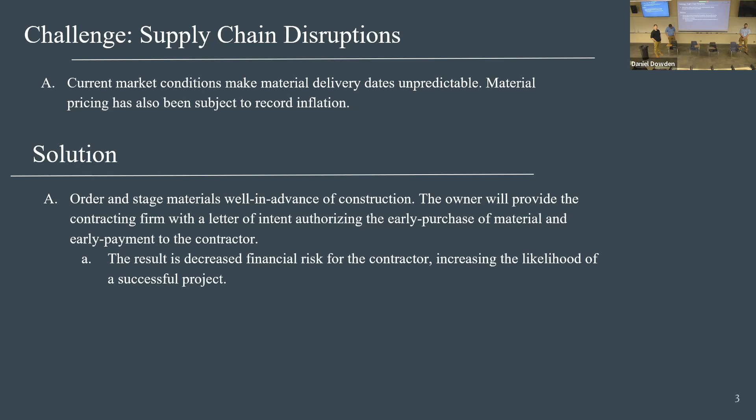One of the first challenges we faced was with current market conditions. There's a lot of supply chain disruptions. To counter this challenge, we decided the best thing to do would be early ordering of materials. And to do this, the owner would have to give the contractor a letter of intent so that they could order these materials and stage them prior to the construction phase. By doing this, it's going to decrease the financial risk and also speed up the construction process and prevent delays.

So another challenge we had was the cross-laminated timber decking. It was such a massive quantity of decking, and the only manufacturing plant for this decking is in Dothan, Alabama. And using SmartLam's data, we calculated that it would take 39 individual shipments of this decking to Houghton for the HSTEM building. Inherently, each of these 39 shipments lies on the critical path.

So with so much variability in each of these 39 shipments, there's a huge potential for our schedule to be off and our schedule to be pushed further into winter. And as we all know, construction in the winter does not happen in the Keweenaw. It could slow progress or even halt progress completely. So we identified that using cross-laminated timber from Alabama was certainly a challenge and exposes the owner and the contractor to significant risk in both schedule and financial risk.

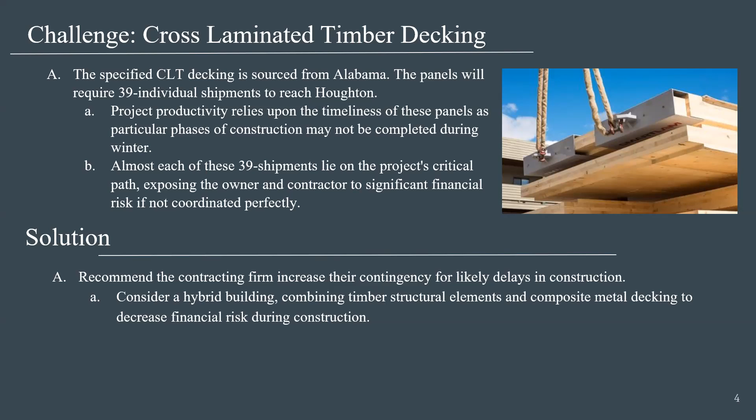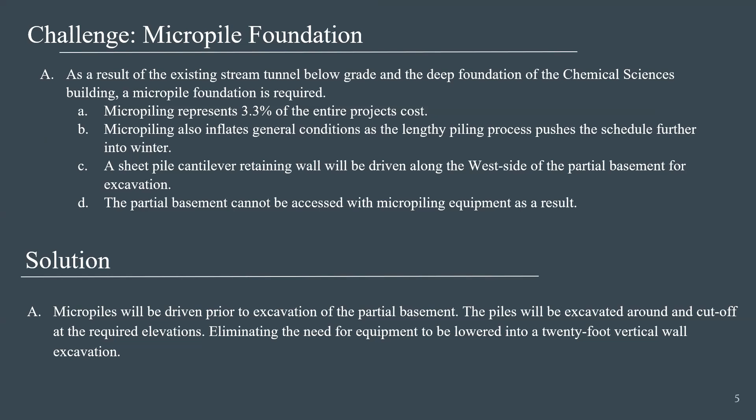Next slide, please. So here we have our total estimate broken down into each individual bid package, and then our direct and indirect costs at the bottom. As you can see, we came up with a total of $22.6 million, which seems like a lot, but in reality, the actual building is much more than that. And due to the design level that we've received up to this point, and there being no MEP engineering done, we had to basically estimate this off a square footage basis, and it was the most accurate information that we had, but it's basically leading to an underwhelming bid on our end.

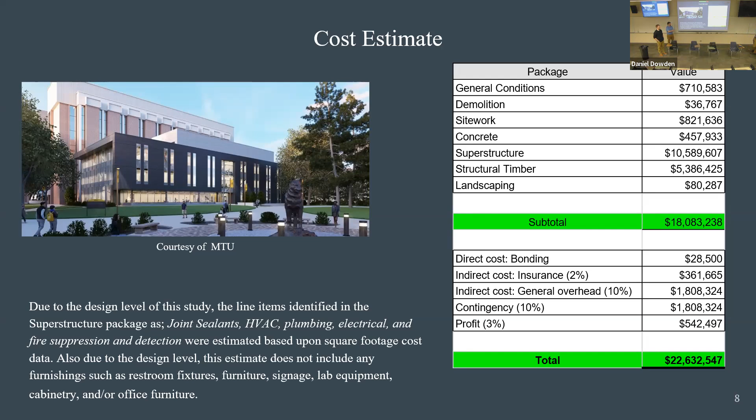So some of the considerations for our estimate: we use data from RS Means, and we utilize a location factor to adjust those unit prices. And then we used RS Means from 2017, so we inflated our cost by 17% for the consumer price index.

And then, like I had stated already, we basically based our estimate off of the original architectural drawings. So that caused issues, but we basically worked with every other group the best we could and got plans from everybody and basically did what we could with what we had.

And then the last part there, the economics of the present and future time value of money were considered in all aspects to develop a refined estimate. And that's just basically accounting for inflation and fuel prices going up and the shipping cost being extremely inflated.

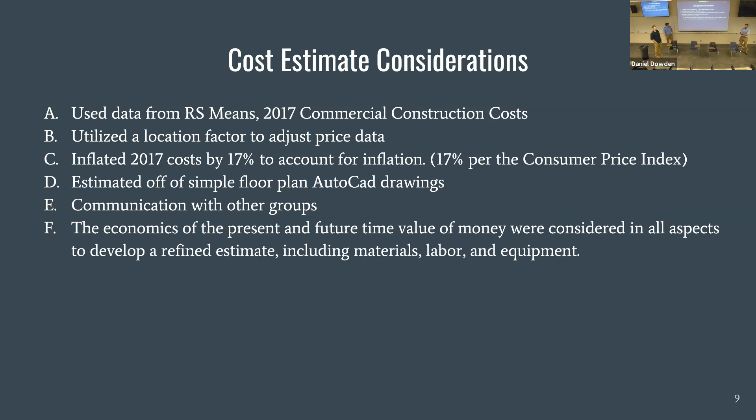All right, so here you can see basically what is our critical path schedule. Like Corey said about the estimate, there's a lot of ambiguity about the drawings that we've received, so we had to be extra careful not to short the schedule. We can always cut days off, but we can't really add more without penalty. So a lot of the major milestones are listed here.

Like when the 100-ton crane comes on site, how long it's on site will really depend on the just-in-time delivery that's going to happen with the CLT decking. If that's delayed at all, obviously the crane's going to have to be on site longer. And then things like the sustainability team, if we're going to add solar panels onto it, we're going to have to bring the crane back on site after basically everything's done and the project's at least weather tight.

So yeah, our 100-ton crane will be on site for about 5 months. We'll have it weather tight in another 5 months after that. And then we left quite a bit of time for all the interior finishes and things like that, because we really don't have any idea what the lab equipment is going to be in the building.

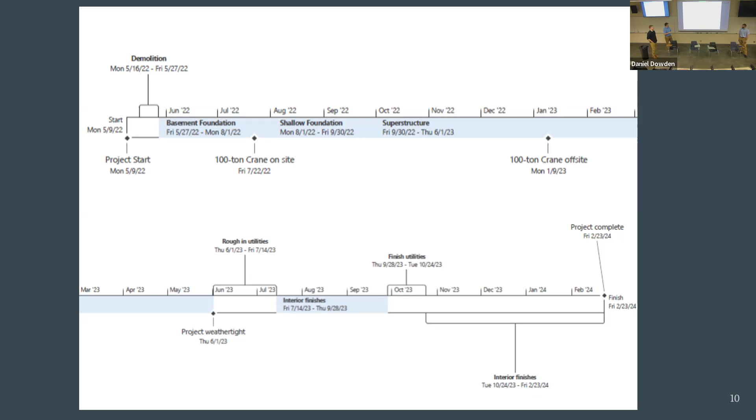And then just some of the things that we did for the schedule overall is we had to identify the critical path, what's completely essential to the schedule and what can be based around other things. Obviously we had to contact SmartLam for the productivity that we were going to be able to do with the CLT decking and those members that we're going to have to utilize.

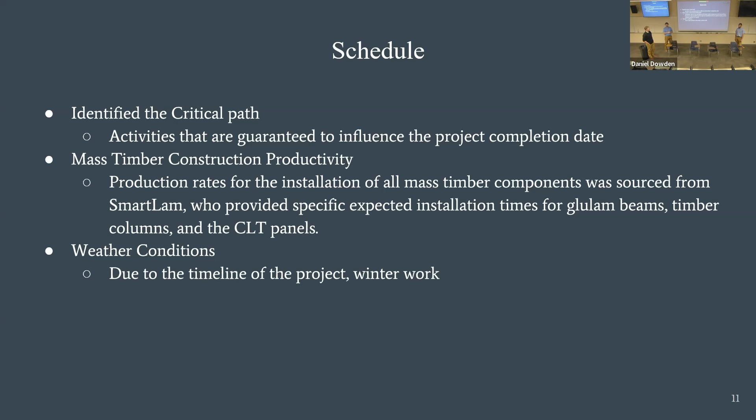And then obviously the weather conditions we had to consider. We have very long extreme winters up here. They're really unpredictable, things like that. So we just had to make sure we considered that at all times.

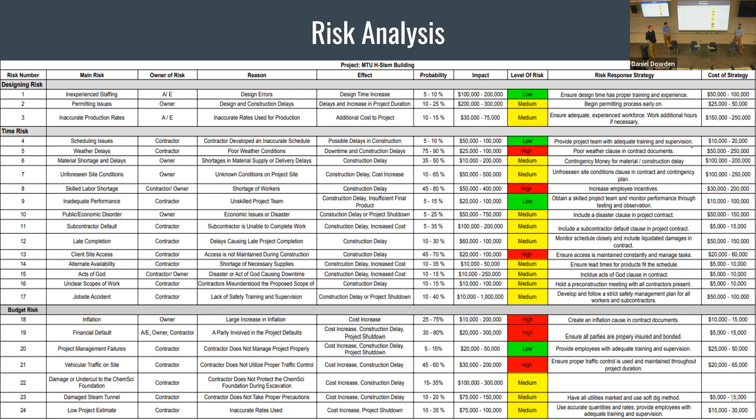Some of the important risks, which we already outlined, are material shortage and delays, unforeseen site conditions, stuff like that are all anticipated risks that you could probably see with this project. A couple other important ones, as was mentioned earlier, there's a steam tunnel running directly under the building. It's about 20 feet deep, and that's pretty close to the grade of the bottom of the basement.

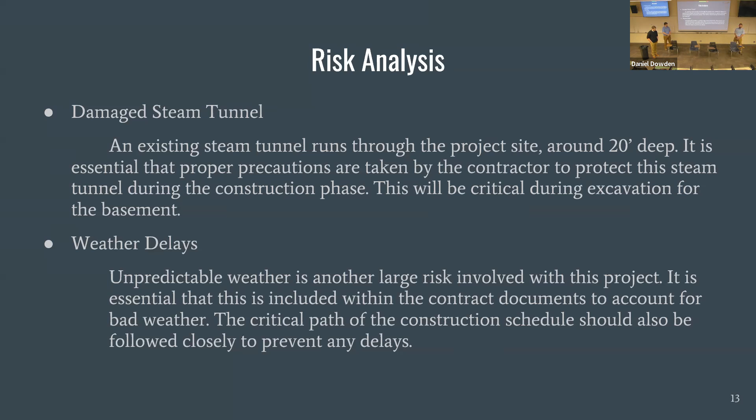So when the contractor excavates that, they will have to be mindful and do their best to protect that steam tunnel. Another one, weather delays. Unpredictable weather is a huge risk up here, especially in the winter. The best way to face this is to follow the critical path on the schedule very closely and provide weather clauses in the contract.

Here's our construction staging plan. You can see the project site there, along with that lot 1 staging area. Those will both have 6-foot high perimeter fencing around them with a privacy screen.

And then there's also a secondary laydown down by the facilities, which would be just secondary materials that aren't real important, but you need on site. And for that lot, right now it's a sand lot, but we provide in our estimate that we would gravel that lot and also offer the option to pave it.

As we mentioned, the questions earlier about moving parking to lot 24, and then the question of why not use lot 24 for staging. It would be, number one, a safety concern, having all this construction traffic go throughout town to get to this project. Along with just a logistics concern, because it's gonna cause great delays. Most of those materials have to be transported by loader. So a loader is gonna be running up and down town.

I don't know, it's probably about a half mile, 3/4 of a mile round trip. So all that's gonna do is delay the construction process. So we opted that the best option would be to use lot 1 along with the other lot down by facilities. And then shuttle the admin parking.

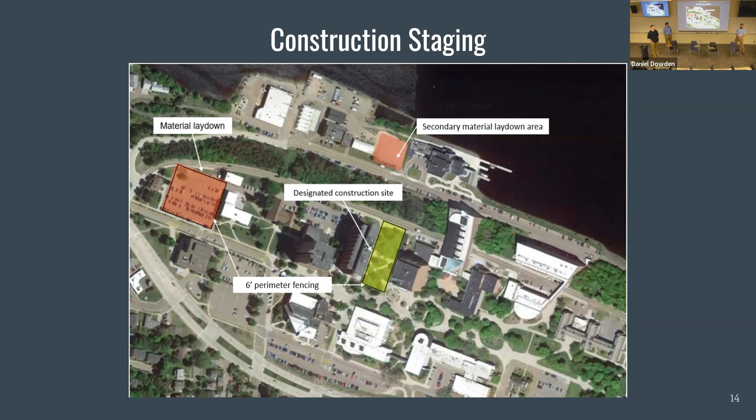So to kind of close things out here, the micropiling and the CLT decking are going to add significant cost to the overall structure. Not only in direct costs, but the two activities are time consuming and they're also very risky with shipping and materials and everything. And that has potential to push our activities towards winter, which could cause some serious problems in the timeline, which is why we inflated our general conditions and have taken into account that it might stall production.

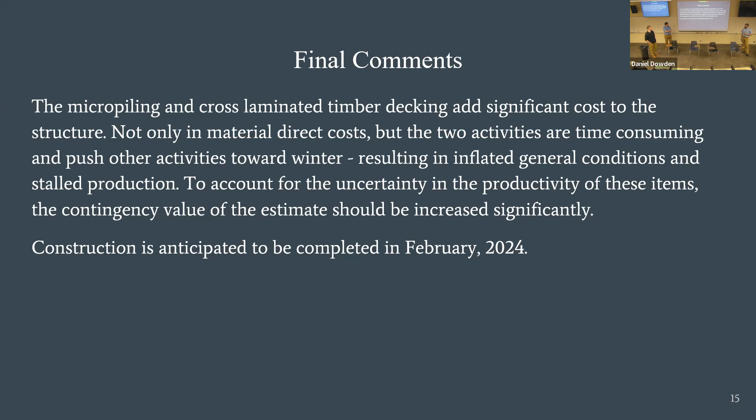To account for the uncertainty and the productivity of these items, we increased our contingency value, and probably looking back at it would have increased it even more. And then basically we anticipate construction to be completed in February of 2024.

So just like the other groups, obviously the standard acknowledgements you want to make are Mr. Dowden, Dave Johnson, our SmartLam rep, Jake Cooter with facilities, and then our head of construction management department, Lynn Arman.

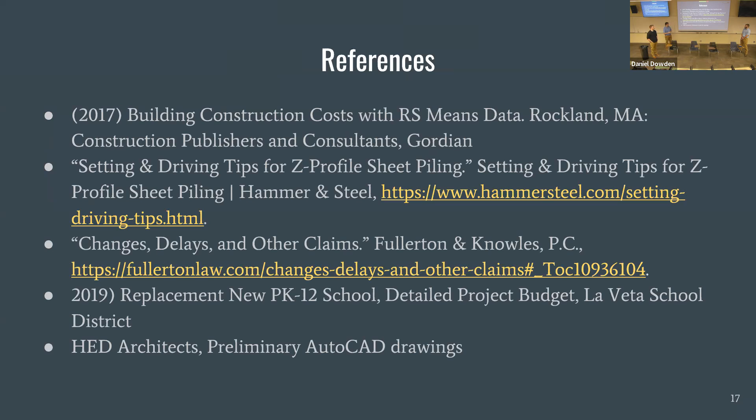These are just a couple of the references we used for typical micropilings, things like that. The sheet piling that we'll have to do because between the ChemSci and the EERC, there's not enough room to have a typical slope that's safe with OSHA. So we're gonna have to drive some sheet piling in there just for the basement excavation, and a couple other things like HED architects that were already mentioned. Just a couple more things we used. That's it, isn't it? Yeah.

Thank you for a great presentation, construction management team. Are there any questions? Along the roadway, along Cliff Drive, where you're going to be taking those materials, I do have to say there were quite a few potholes and stuff. The road conditions are kind of not the best. So is there going to need to be an enabling project to make... there's a lot of potholes even that are that rated. So it seems like if you're putting in loaders to bring stuff up the road.

Yeah, I believe we included, at least in our estimate, an alternative to pave that road afterwards, because there's gonna be a lot of, like you said, loader traffic on it, and then the just-in-time delivery that's gonna bring semi trucks and stuff like that. Typically, with a project like this, the school is already thinking about the fact that it's going to cause issues with the road. I don't know for sure what they actually have in the plans, but a lot of times they'll set money aside for a road reconstruct afterwards.

And I would like to add, being the nature of the work, the H-STEM building being commercial construction, the road work being road work, the owner would most likely want to utilize two separate prime contractors to accomplish both of those projects. Great. Any more questions?